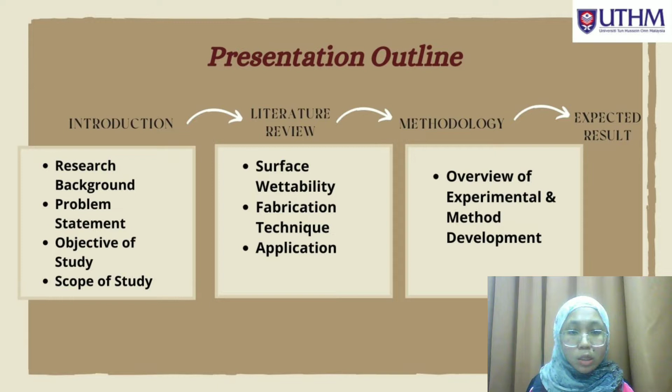Throughout my study, a guide outline has been created in order to complete this project. The presentation includes introduction, literature review, methodology, and expected result. Okay, the first part of my introduction is research background.

Superhydrophobic surfaces have been developed due to inspiration from nature phenomena. Lotus leaf and some other plants are known to have unique surface structure. When water drops on the leaf surface, it will simply roll off the surface instead of penetrating into the surface. While rolling off, water will transport away any dirt or dust on the surfaces. Hence, roll-off of water results in self-cleaning of dirt and dust as well as anti-fouling properties against contamination and bacteria.

To achieve roll-off and water repellency of the superhydrophobic surface, it needs to have rolling angle less than 10 degrees and contact angle larger than 150 degrees. High contact angle indicates that contact area between water droplets and solid surface is relatively small, which results in low surface wettability, making liquid droplets not spread very much onto the surface.

Moreover, high contact angle value leads to air entrapment between gaps of the rough surface, and hence water droplets do not hit all the surface areas. There are remedial applications of superhydrophobic surfaces as self-cleaning, anti-fouling, and anti-corrosion.

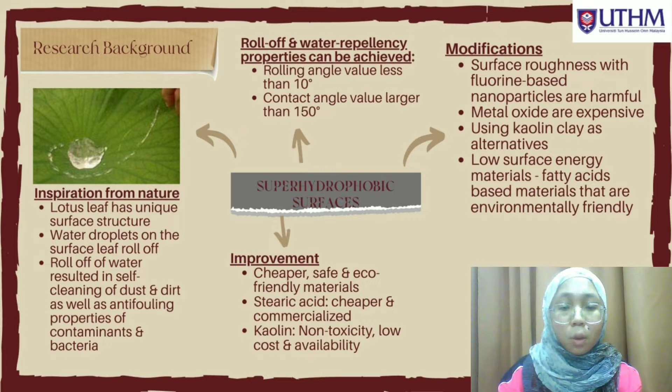Next, previous development of fluorine-based superhydrophobic surfaces is expensive and harmful to environment. And surface roughness via pure metal oxide nanoparticles is expensive. So, cheaper, safe and environmentally friendly, using deposition of Stearic acid modified Kaolin nanoparticles, a Fluorine-Free superhydrophobic silicone rubber surface will be developed.

In order to overcome this problem, several objectives have been created. The objectives are to fabricate superhydrophobic silicone rubber film via surface deposition using Kaolin nanoparticles. Next, to characterize surface wettability and physical-chemical properties of the superhydrophobic silicone rubber film. And the last one is to evaluate self-cleaning and anti-fouling properties of the superhydrophobic silicone rubber film.

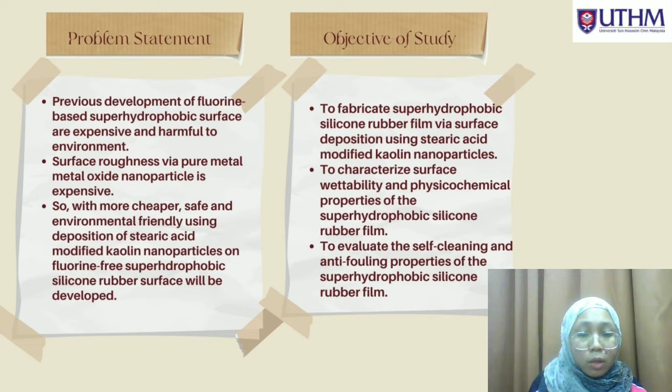Okay, to achieve the objectives, a few scopes of work have been identified as follows. First, the silicone rubber film will be prepared and then Stearic acid modified Kaolin nanoparticles will be coated on the surface film. Next, the contact angle will be used to characterize surface wettability and the physical-chemical properties will be characterized using AFM, SEM, and FTIR.

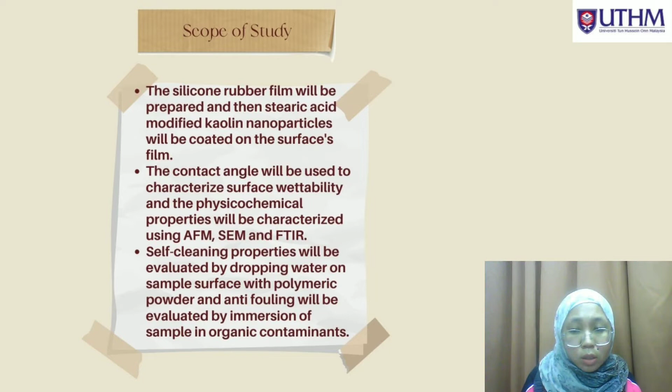The last one is the self-cleaning properties will be evaluated by dropping water on sample surface using polymeric powder, and anti-fouling properties will be evaluated by immersion of sample in organic contaminants. Okay, next let's move to the literature review.

Surface wettability is one of the most important parameters affecting superhydrophobic surfaces. The provided picture shows two states related to surface wettability. The first picture is the Cassie-Baxter state, which indicates that the rough surface is heterogeneous in nature because air pockets exist between the gaps of the rough surface.

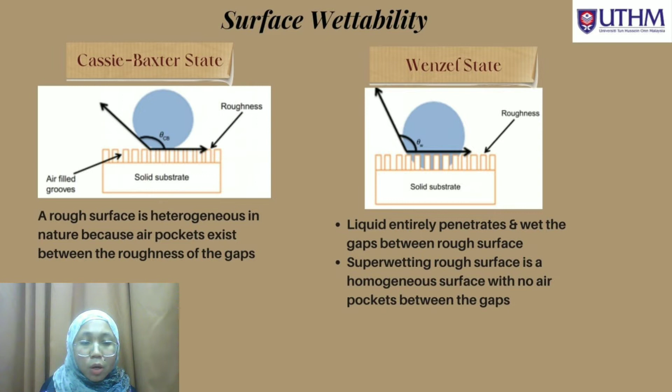The next picture is the Wenzel state, which indicates that liquid entirely penetrates and wets the gaps between the rough surface. The rough surface is a homogeneous surface with no air pockets between the gaps. To create a superhydrophobic surface, a fabrication technique with surface roughness and low surface energy material is necessary.

Chemical etching is one of the techniques that can easily roughen the surface. For instance, many organic polymer and glass surfaces can be etched and roughened using plasma technique. Next, in electrochemical deposition of metal film, surface roughness can be generated by electroplating under potential or diffusion limited conditions.

Other than that, nanosphere lithography can be applied as a template to build topographically textured patterns on substrate materials. Moreover, sol-gel method is another frequently utilized method that can induce surface roughness using secondary components. Lastly, nanoparticle deposition such as fluorine-based nanoparticles can create surface roughness.

Okay, the next fabrication technique is using low surface energy materials such as fatty acid together with surface roughness to create a superhydrophobic surface. Fatty acid is known to be insoluble in water as their chain length rises and can form a molecular film on the air-water interface. Examples of distinct fatty acids are stearic, oleic, and elaidic.

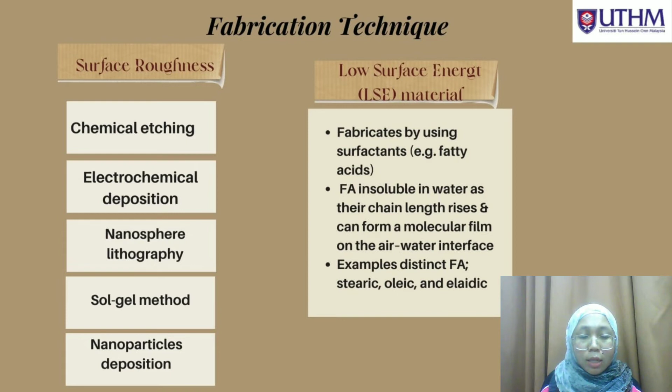Okay, now I proceed to the application of superhydrophobic surface. Superhydrophobic surface can exhibit self-cleaning and anti-fouling properties. The figure shown indicates the self-cleaning process of fluorinated polysiloxane titanium dioxide superhydrophobic coating.

After sprinkling a sparse layer of contaminant powder on the surface, a water droplet was placed on the contaminated surface. The contaminating particles were immediately absorbed on the water droplet surface when they came into contact with it. Then the pollutants were entirely absorbed by the water droplet after numerous cleansing processes.

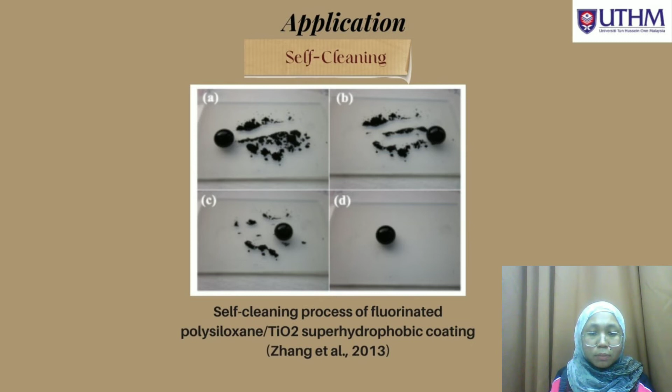Next, superhydrophobic surfaces with anti-fouling properties can be applied in seawater. Anti-fouling coating is used to inhibit the formation of biofilm in both biocide and non-biocide environments. Microorganisms cling to the surface of an object, known as substratum, and produce biofilm. The object then develops a complicated structure made out of groups of microorganisms that multiply and coat the surface with biofilm.

The common types of anti-fouling coatings are self-polishing coatings and fluorine-based coatings. Moreover, spray can be utilized to create anti-fouling self-cleaning coatings. The addition of zinc oxide nanospheres on the surface shows good mechanical and anti-corrosive properties under aqueous conditions.

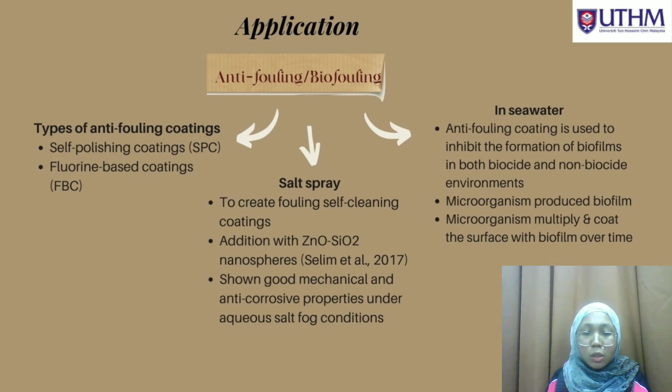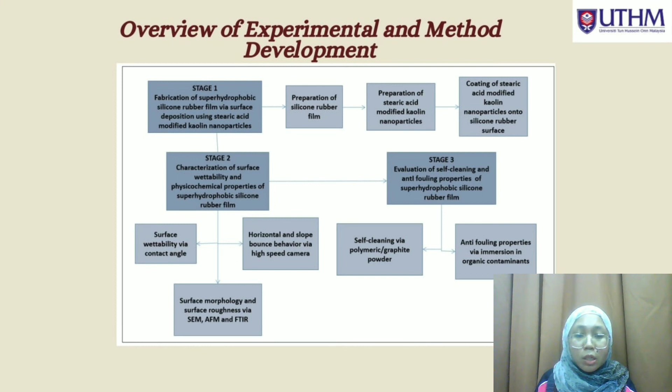The last part of my presentation today is the expected result of my research. It is expected the modified silicone film will have a superhydrophobic surface with a contact angle greater than 150 degrees and a rolling angle less than 10 degrees. Next, it is expected the deposition of stearic acid modified kaolin nanoparticles on the surface of the silicone rubber will successfully increase surface roughness as well as decrease surface energy.